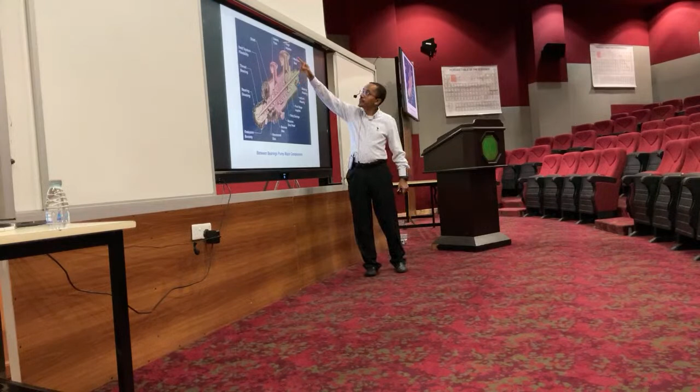Suction - it's a double suction impeller, directed to here and here. So it's double suction, then you have the 4 stages. Here, unlike the previous one, they are stacked in one direction. You can tell it's double suction because the pressure here is low. So they use the double suction to improve the requirement.

Between bearings, we have the bearings here. What else? Suction, discharge, mechanical seal are here, and the shaft. The coupling is here, and after that you have the motor.

This pump, we call it barrel type, because the insert here, or the cartridge, is considered a pump itself, and the barrel is another casing. So whenever you want to maintain it, you just pull the bundle. Why do you think we need it like this?

It's definitely more expensive, but is there any reason to go with this type? Maybe it can handle higher pressures - yes. Or sometimes if you have a very sensitive service with a light hydrocarbon that can easily leak. Axial split pumps can easily leak, unlike radial split, which have a better option. The sealing here is the flange, the casing flange, so if it's going to leak, it's going to leak from the flange, which is correct.

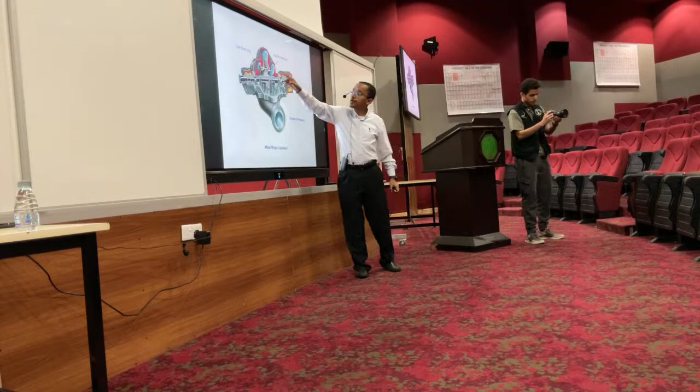Here we have the wear rings, here and here. This is a double suction impeller. You can see the liquid is introduced from the suction flange through this area and this area, and collected through the volute to the discharge. And you have the wear rings here and here.

Mechanical seal is equipment or device to prevent leakage to atmosphere, for the reason we mentioned before. It has a stationary component and a rotating component.

Stationary component is whatever is bolted with the casing; it's not going to rotate. For example, the gland for the seal is attached to the casing, so you can imagine this component is static, not rotating, stationary. While anything on the shaft will rotate with the shaft.

For example, this sleeve is rotating because it's set on the shaft. This gland and this face of the seal, we call this the stationary face, because it's stuck with the flange or the gland of the seal. And this one is rotating with the sleeve. So it is rotating face and stationary face.

You have other components to seal, because liquid will try to leak from different sources. Imagine this is bolted to the casing; the first thing it will try to leak from is between the gland and the pump, through this O-ring. So this is a static component to seal liquid from going out. It will also try to leak from under the sleeve, so we have an O-ring here to avoid it going out to atmosphere, and you have other components like this.

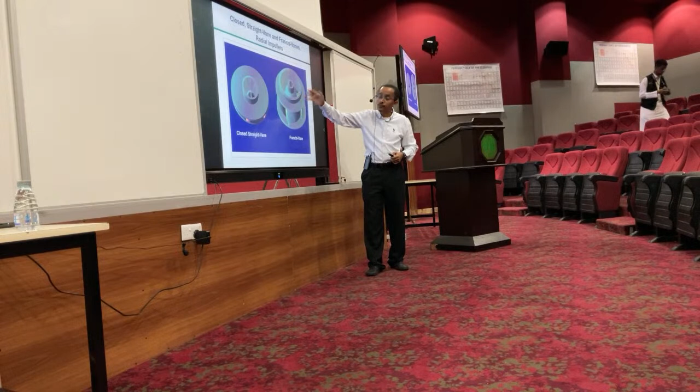We might have a closed impeller where the impeller vanes are contained with what we call the shrouds. Sometimes we have it from one direction, sometimes from two directions—we call it closed. Sometimes only one direction, so it's open, from both sides.

There is no axial flow here, so it doesn't have a shroud. So we call it open, semi-open, or closed from one side. Like this one, from the back side it's closed, from the front side it's open. Liquid goes in this way and is pushed radially to the discharge because it's closed from one side. You can tell you're looking at relatively medium pressure on this side.

Let us leave it for later. Moving to the coming slide, sometimes you have what we call pump-out vanes, which are vanes in the back side of the impeller. Do you know what's the function of them? Yes, it helps balance the axial thrust because it introduces a pressure on the other side.

It has another function, which is the main function. From their name, they call it pump-out vanes. Usually when you look at the impeller, liquid will try to go to the back side, and if you have suspended solids, they will accumulate in that side and damage the pump and the seal. So this is another option, pump-out vanes push out any solids from accumulating in the back side of the impeller.

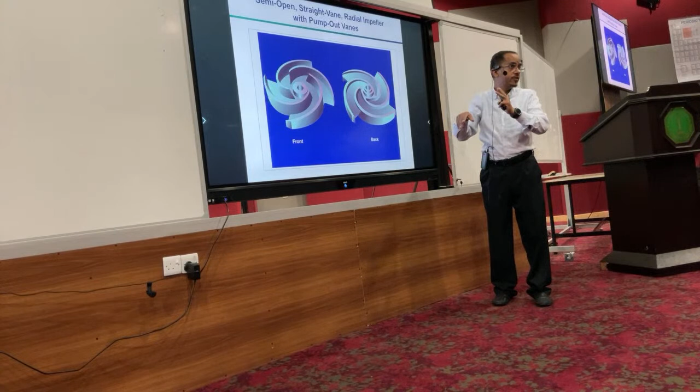We call it a closed impeller because the vanes are contained within the shroud. Sometimes we have a special type which we call the Francis type, twisted vanes. You see the vane, if you trace it from here to here, it's just twisted with an angle from this to here. We call it Francis type.

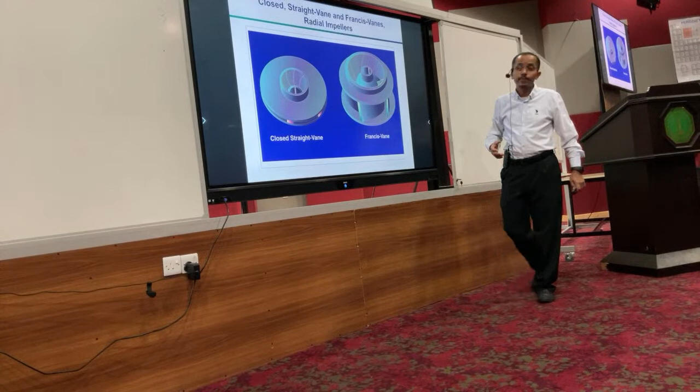You might ask, why do we need to decide which one to select? As end user, we don't select. It's part of the design given by the manufacturer. There are certain requirements that the vendor should go through to define which type can be selected.

We have a criteria called specific speed, given by this formula: RPM, which is the rotation in RPM, times the square root of flow in GPM, gallon per minute, divided by the head, which is in feet. You can tell if you have high flow, what's going to happen? Is this number going to be high or low? High, this is high, this is low, relatively low let us say.

So the number will be high, we are going to the right, it's axial flow. What's going to happen if we have a very low flow rate, high head? It's going to go to the left, we will end up with this type of equipment, with a larger impeller diameter and a very narrow gap between the shrouds to give you very high pressure, low flow rate.

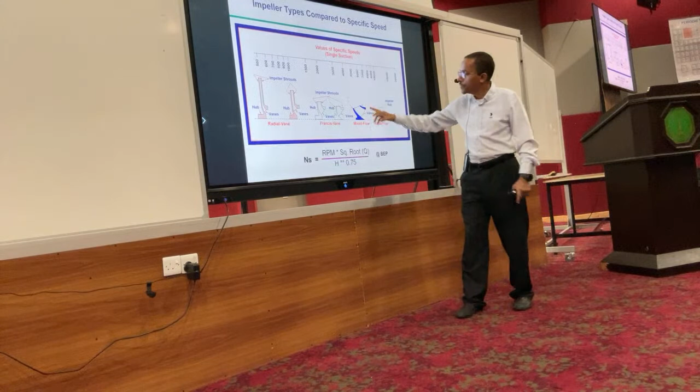Or we might sometimes fall in between, mixed flow, Francis type. So this is what defines what kind of impeller you might need to select. And as end user, we don't get into this. It's the design, the vendor selects the equipment based on these requirements.

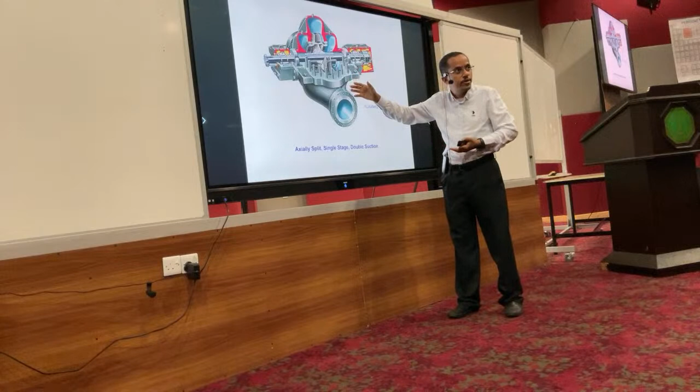Casing can be radial split or axial split, as we explained. Single volute, double volute, diffuser, staggered volute. These are related to the internal geometry of the casing, and this is what we're going to cover now. This is axial split, top and bottom. Imagine when we talk about leakage, like with light hydrocarbon, the flange area between the top and bottom is very large, so the chances of leakage are very risky and high for axial split. This is why we don't use it for light hydrocarbon or high pressure applications.

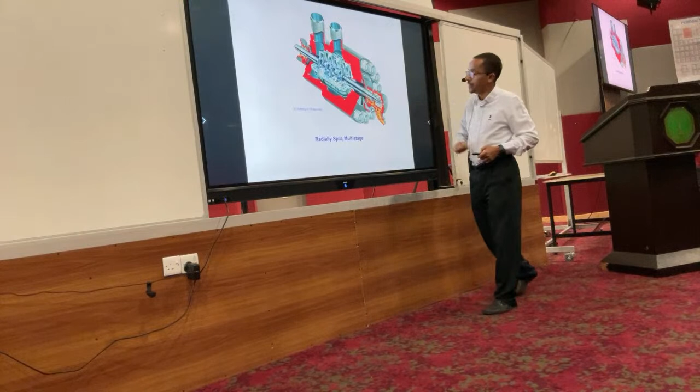Motor and gearbox. Now let's talk about the pump loads. We need to understand the loads generated through the pump to be able to support it with the bearings. So we have radial loads and axial loads.

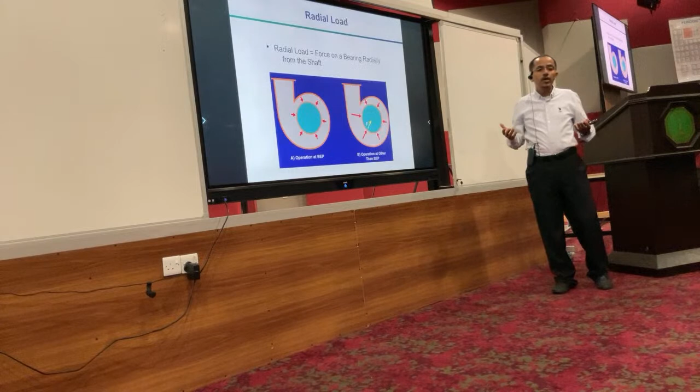Where do we get the radial load and axial load? We have static pressure, static forces like the weight of the shaft and the weight of the rotor, and we have dynamic forces coming from the liquid flow itself. These need to be understood in order to select the right bearing design or modify the geometry of the pump to reduce the loading.

When you look at the best efficiency point, where you have a smooth flow, the distribution of the forces on the shaft - imagine the impeller mounted on this shaft - the pressure or radial force distribution through the shaft will be almost the best in terms of distribution at the best efficiency point. It will not be eliminated for sure, there will still be some load, but it's going to be minimum. While if you operate away from the best efficiency, there will be some turbulence which will lose the condition that you had at best efficiency.

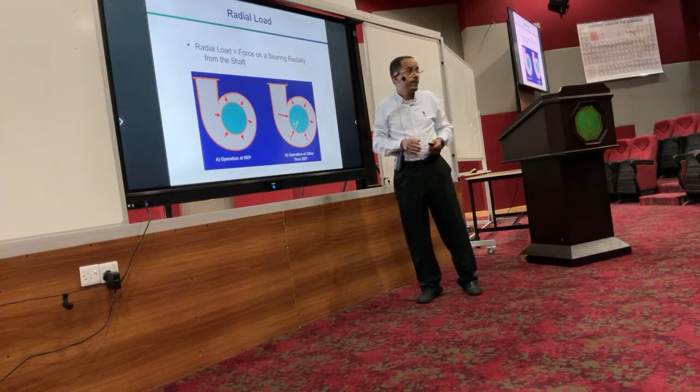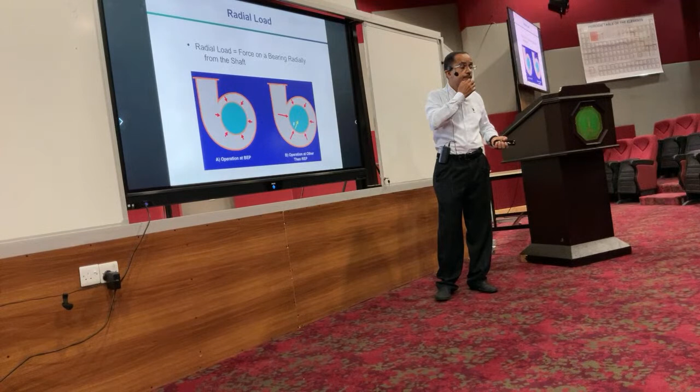Now, non-distributed force, what does it cause? Forces on the shaft that give you vibration. The turbulence coming in the pump, all this will be seen as radial loads on the rotor, which will be seen as vibration because the whole rotor is not running in a smooth condition. More vibration basically means more loading on the bearing, but this doesn't get exhausted and go away from the bearings.

Just imagine you have turbulence - what's going to happen? Stability is not going to be smooth, meaning you'll have more movement on the shaft itself. It will be seen as more vibration, and more vibration will impact the reliability of the equipment. So this is not what you're looking for.

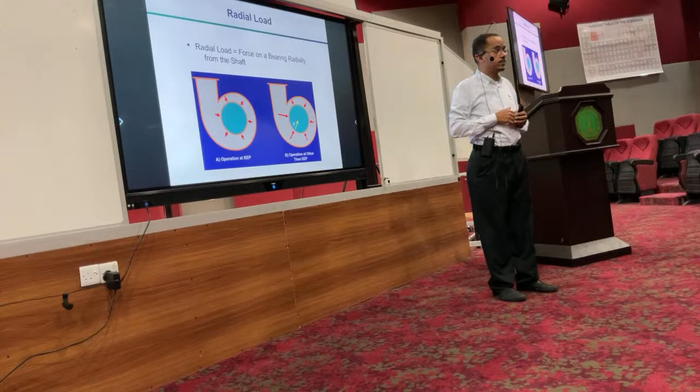This is why we say avoid running away from the best efficiency point. I do agree we should run nearest to the best efficiency point, but I'm after how severe it could be - it could be severe to the point that you damage the equipment very quickly. Especially when we talk about high energy equipment, running them at low flow, very low flow rate, you can damage it within seconds because of cavitation.

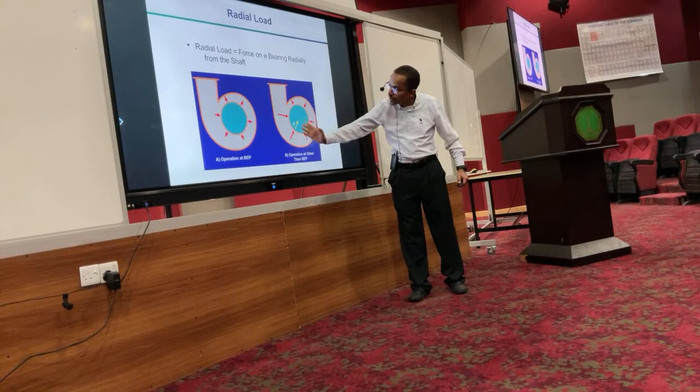Because of cavitation, and even when you look at very high cases, because of vibration as well. Now this area we're showing here, we call it the volute. If we take the resultant forces acting in it, like in one direction and to here - imagine liquid flow going between the vanes all the way through the volute to the discharge flange.

During abnormal operation, the result will be a force acting on the shaft. This is the shaft - let's imagine a force is acting this way, so it will be pushing it this way. It might be very high, to the point that the equipment might not withstand it.

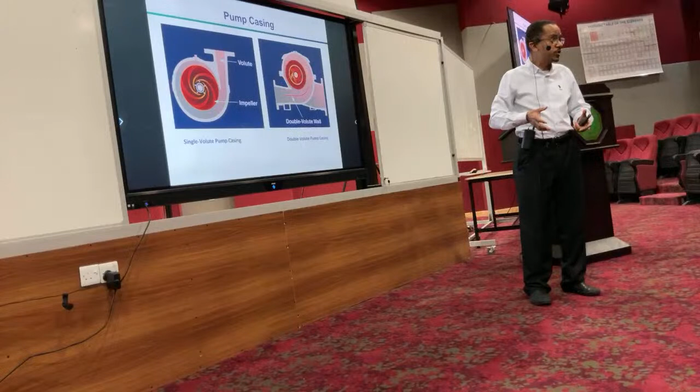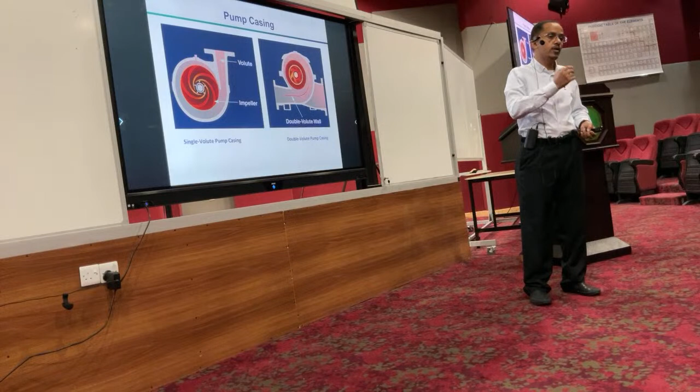If we talk about an overhang pump for example, we have a standard limitation for the size. Why? Because we know for a fact that if we have large equipment with a very large radial load, it will have very high vibration that won't give you good or reliable equipment. So for example, Aramco or other end users limit a single volute to a certain size. If it exceeds that size, it means the loading is more and the stability won't be as good as if you have it with another option.

So the other option is they have another wall, they call it double volute. What does a double volute do? If you remember one of the pictures, it was showing the volute extended to the discharge flange. It basically splits the liquid flow into this direction and this direction, so the liquid will exert a force this way, and the opposite force the other way.

So it will somehow reduce the radial load on the shaft, and this is one way to balance and reduce the radial load using a double volute - that's one of the simplest ways. Just imagine if we can have more walls vertically, that will improve the radial loading more and more.

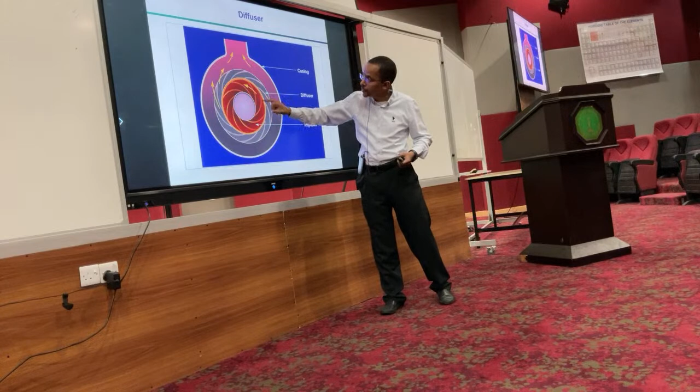And this is what we have with a diffuser type. The diffuser is a stationary element like this, with stationary vanes. The liquid passes through and splits between the stationary vanes - this is the impeller, so the liquid will be pushed through the diffuser vanes, and that will give a very perfect balance for the flow, ending up with a very smooth balance for the radial load.

This is more expensive. Only cost? Yeah, it's only cost. This is the main issue, of course.

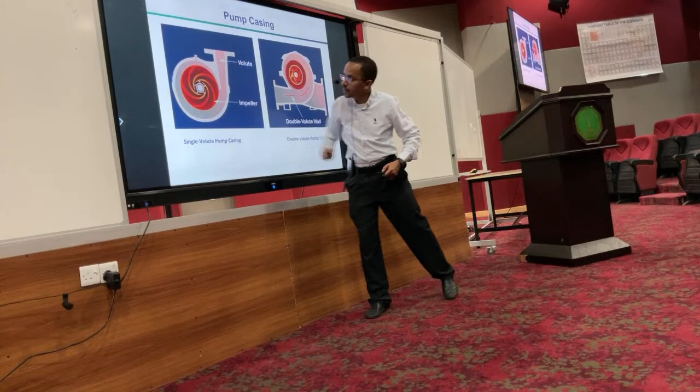There is a between option for radial loading, what they call staggered volute. Imagine this is the first stage and this is the second stage. We said the radial load is acting this way, right? Here, for example, it's acting this way, and the other one is acting this way. You look at it, they are balancing each other somehow. So that will balance the radial load. That's another option, a cheaper option.

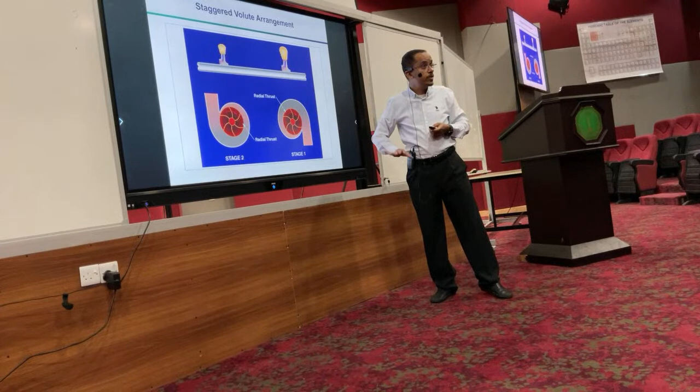Of course, as an end user, we don't say go with this. We're talking about multi-stage pumps. Sometimes they go for staggered volute arrangement, or sometimes they go with diffuser. It's a vendor call. For us, we want equipment with a certain efficiency.

We have what we call life cycle cost evaluation. This is the criteria for how to buy equipment: how much it will cost to operate and maintain it for 20 years. We count for energy consumption, which means we count mainly on efficiency, power consumption, maintenance and capital cost. Sometimes the capital cost is peanuts comparing to the total. So that will push him to go with diffuser if he is not able to maintain the efficiency.

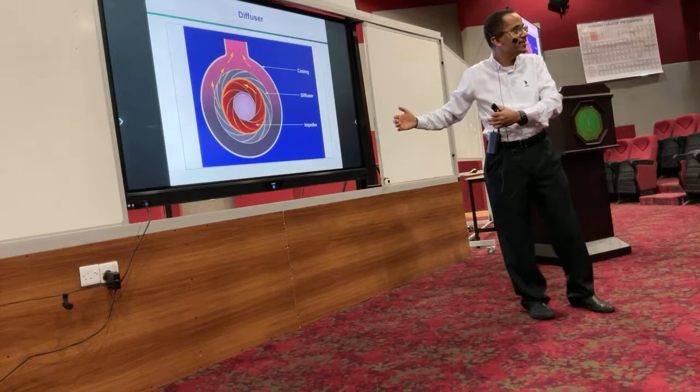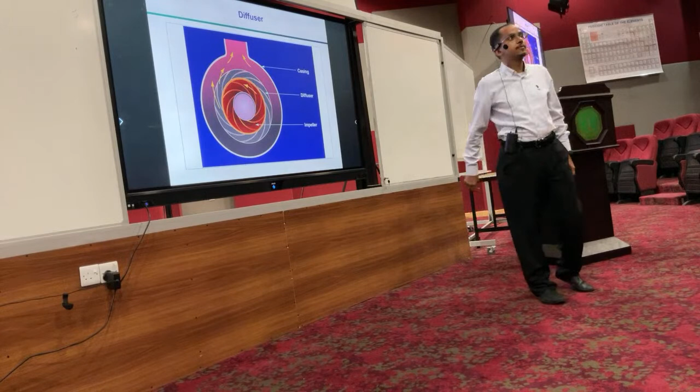Yeah, when you operate far from the best efficiency point. Wait a bit, it's on the slide. I know what you are looking for. But this is what we have as a diffuser. This is what you are talking about.

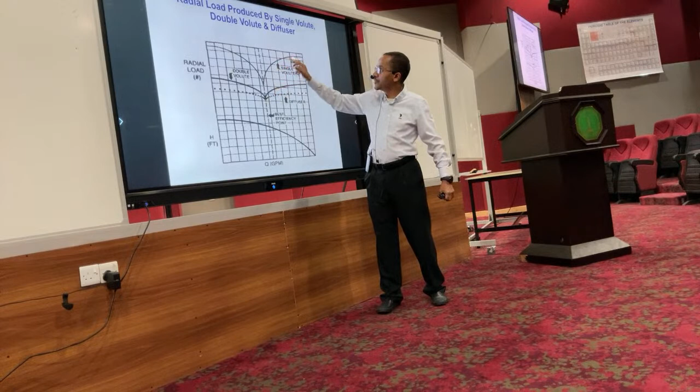When you deviate and operate with a wide operation range - look at the difference between the loading here, this is the curve for the radial load - it will be lower with respect to this, but the increase is very high. It jumped from here to here with a single volute. That's a proof of the argument earlier when we said it's not recommended for large equipment, because basically we'll have very high loading and that's not going to be a good option.

So this is the single volute. For double volute, there is a huge difference, you see the difference between them is very high. But still there is a deviation, or increase, and when you go away from the best efficiency it will increase the radial loading. The diffuser is the best - you see, the deviation is little, so it's the best option in terms of loading.

So what about the hydraulic losses then? If you deviate from the best efficiency with the diffuser?

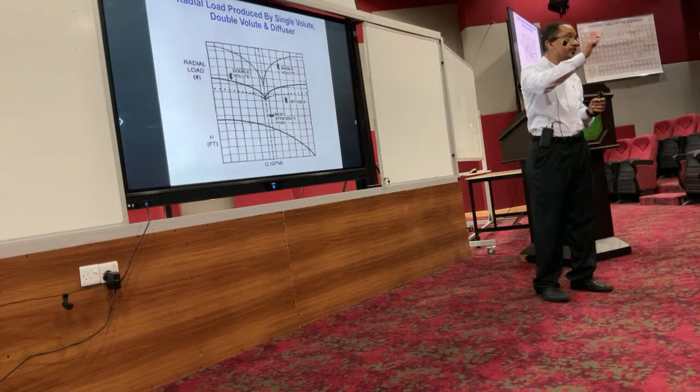The losses, okay, of course we're talking about, if we talk about efficiency, sometimes going with diffuser type will give you a better, good flow that will improve your efficiency, let's say. But if you compare it to the best efficiency point of the equipment, sometimes depending on the design, there are turbulent losses due to turbulence in the diffuser. Sometimes the efficiency that diffuser type has is lower than expected.

But in general, we usually don't operate at best efficiency, just close to it, but mostly it's not very close. Of course we have equipment that is either standard or custom type. If it's custom type, we try to select it very close to the best design, closer to the best efficiency, but there will always be some gap.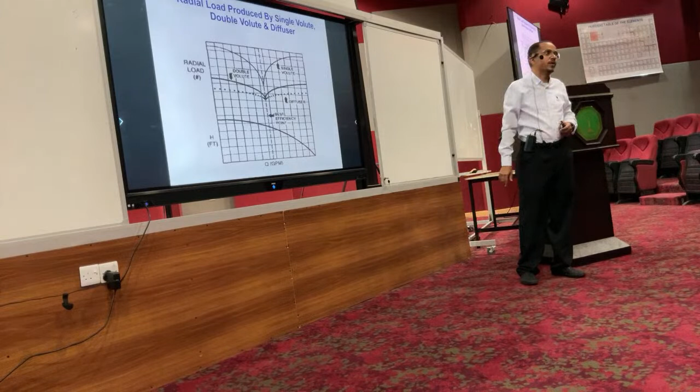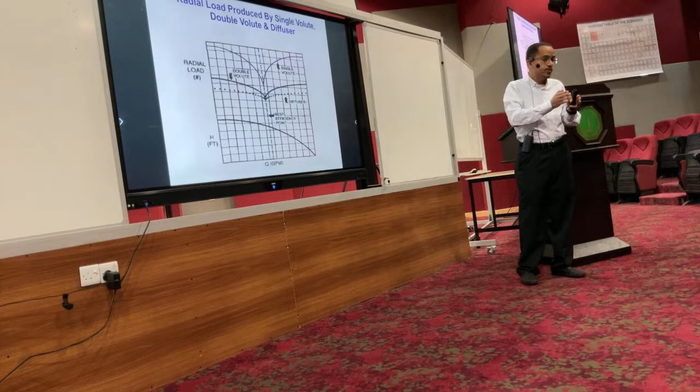Plus we have a difference between the design point and the normal flow. Normal flow is the average flow through the year. So that will be like an average flow, which means the equipment will not be operated exactly on the best efficiency point, but within a range.

Axial load - we have forces on the bearing from the axial direction. When we look at it from a static point of view, the pressure on the pump, on the impeller, you have suction pressure, and from both sides discharge pressure. Both are discharge pressure, but you can see the pressure here is higher. Since this discharge pressure and this discharge pressure cancel each other, you will be left with this, and you can tell this is lower and this is higher. So you end up pushing the impeller to the left.

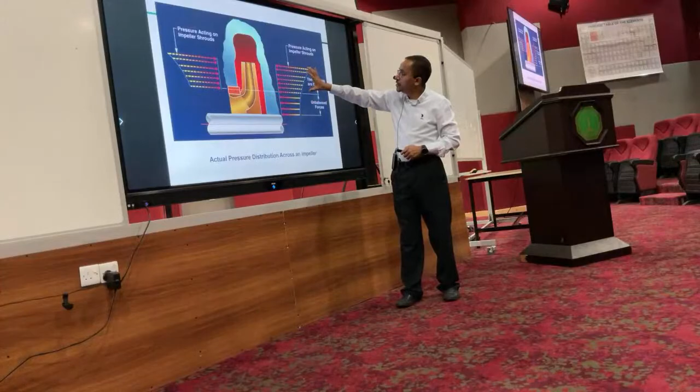This is what happens in reality because you have some losses, so it's going to be like a pressure distribution - higher here, lower when it reaches the bottom. But in general, this area and this area will see the same pressure, so it will cancel. So you end up only with forces from this area, acting in one direction.

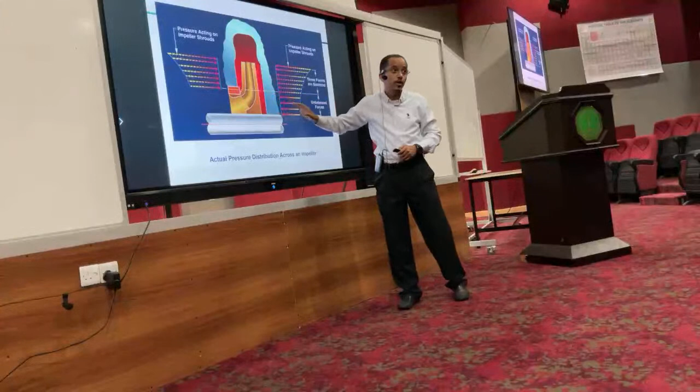Before we continue, we also have other elements on the axial loading, especially when we talk about vertical pumps. The load of the shaft has to be counted sometimes. Vertical pumps are very sensitive, or the bearing design is very sensitive, to the mode of operation. Because sometimes the force is higher in one direction, then if you change your operation condition, it might be pushed to another direction.

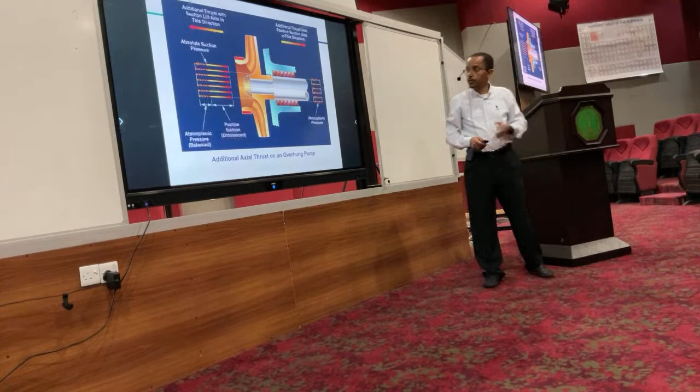Okay, let's talk about head now so we can talk about performance. The head can be defined by different things. Head is energy per unit weight, or head is elevation difference, or head is differential pressure when you convert the pressure to head. If you have a liquid pumped from this level to this level, this is what you get as head, right?

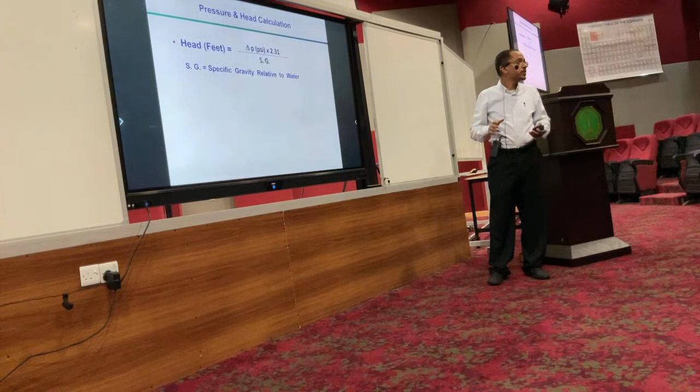Whenever you look at the pump performance curve, you see head versus flow. The relation between head and flow is: head equals differential pressure times 2.31 divided by specific gravity. So whenever you change the specific gravity, the head stays constant for a given flow rate, but it might impact the given or generated pressure.

One of the things we have to understand during the early stage of design is the requirement for the pump. The designer, when he starts to construct or design the facility, starts with the static equipment - what is the requirement for a feed, static equipment pressure like a vessel, a reactor, what's the source flow and pressure coming to you. Then when he designs his network with the piping, everything, he goes and selects the equipment, the rotating equipment.

So it comes at the last point. First you have to understand the system requirement - how much is required to push you from here to that point, how much resistance from the system will be seen, so I can overcome it with a properly sized equipment. This is something you don't see in daily activities - it's only during a change in design, like a design stage.

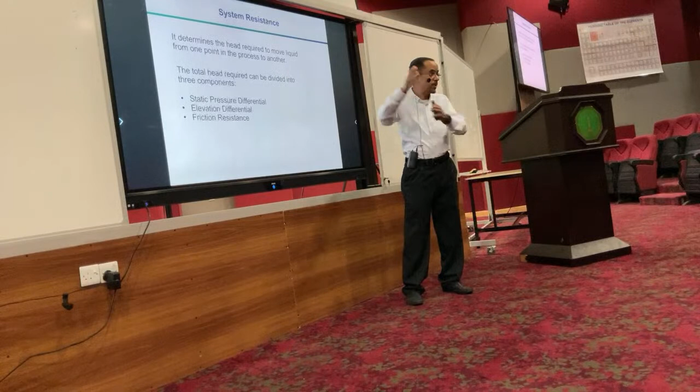And there is friction resistance. Is friction resistance static? It's not. When we say static, we basically look at it with respect to the flow rate - I have a pressure here, I have a pressure there, and I'm not going to change them regardless of the flow rate. Same with elevation. But friction - what happens to friction if I increase the flow? It increases. That means I have to understand my requirement from the beginning to cover the worst case, because if you design without considering the worst condition.

You might end up with equipment that will not be able to deliver. So you have to understand the system resistance.

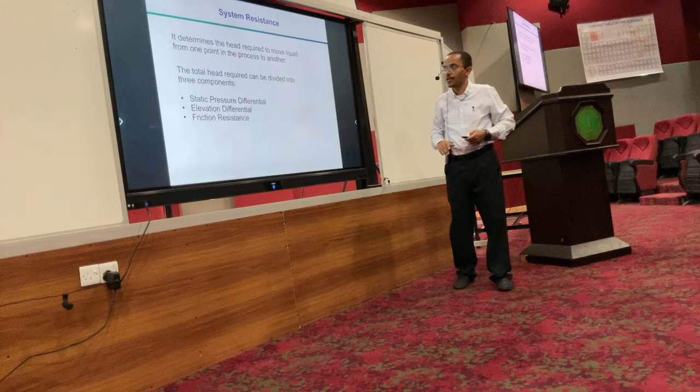The first one is the pressure difference, and pressure can be converted into head by the formula we went through. Then elevation difference, and the friction resistance. If I have a cooler with a control valve, what's going to happen if I close the control valve? In terms of friction, more friction. So I have to consider this in my design to overcome that friction.

I also have to understand how much flow the pump is going to deliver. Whenever you change the friction by increasing the flow rate, you will basically increase the pressure drop exponentially.

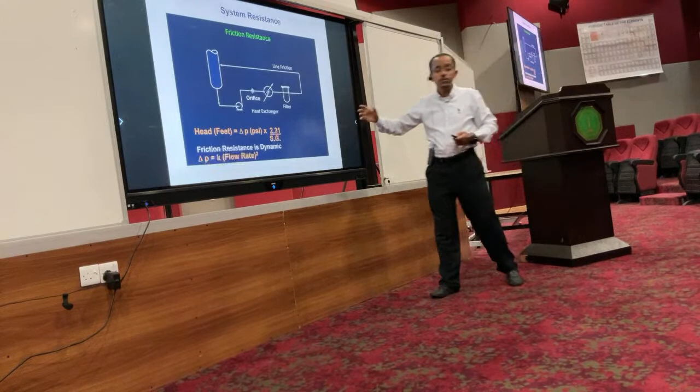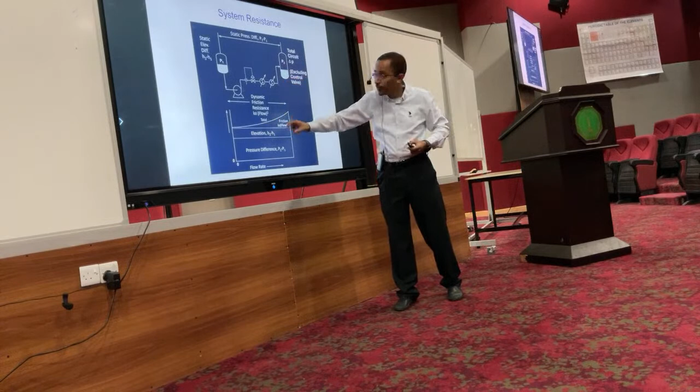What is K? It's a factor, the friction factor. Is it based on a standard? No, it's based on the system friction: how much friction in the piping, how much friction in the static equipment and in the valve. Whenever you increase the friction, the curve jumps up very high, because the factor can increase as well.

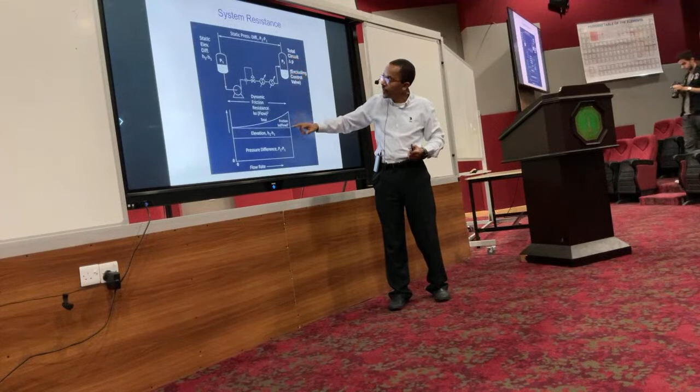In a real system we might have point A, point B, with different elements like control valves and static equipment. If we put it all in one curve, we have the pressure difference plus the elevation difference and the friction resistance. Whenever we change the flow rate, this will change and give us the system resistance curve, considering the control valve at a certain opening. The control valve or valves play the main role in changing the system resistance. Whenever you close it, it will shift.

So for the pump curve, to understand the requirement, we have to first understand the system curve, then determine what I need to give the pump. The pump curve shows the relation between head and flow rate. Typically, centrifugal pump performance curves follow the same behavior: maximum near shutoff at zero flow, and dropping as flow rate increases.

If I plot it together with the system curve, the equipment will operate at the intersection point. The intersection between the system curve and the pump performance curve is my operating point, so the pump will operate there. Do I need to operate only at that point? I might need to operate at different points, selecting the equipment to operate there. So how can I control it?

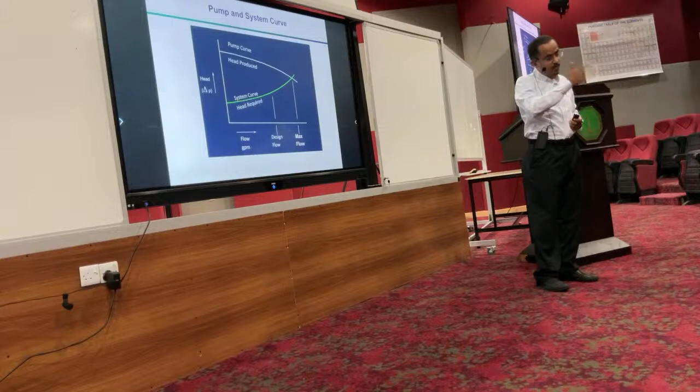Can I control the equipment or control the system? If I want to control the system, I can put a valve to increase the friction. Can I control the pump? Yes, I can use a variable speed drive to change it. If I have a lower speed, I can just shift the curve lower.

The pump performance curve can be shifted lower by reducing the speed, or higher by increasing the speed. That's one way to adjust the operating point, moving it from here to here. For example, if I shift it here, I'm going to operate at this point, or maybe higher to operate at another point.

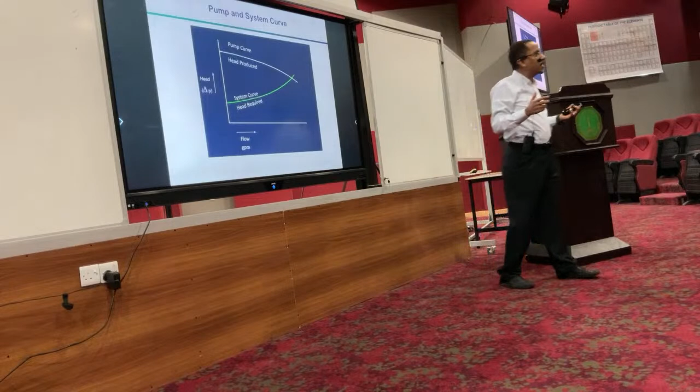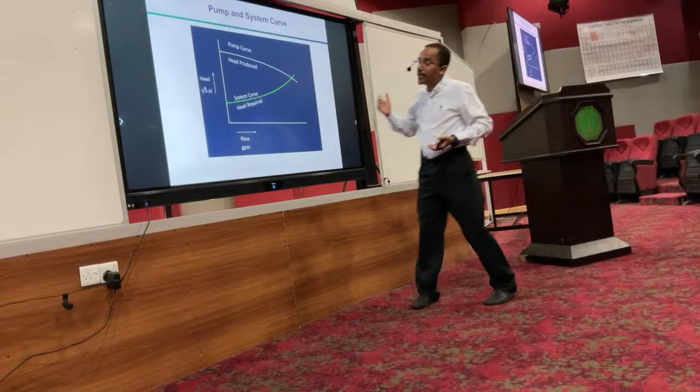But variable speed drives are very expensive, so you don't go with them unless you need them. There's always an economic evaluation, and sometimes they're not even attractive depending on the system curve. Sometimes the gain you get, depending on the system curve or slope, isn't that much, and it won't add good value. So I don't want to go into detail, but it basically runs through economic evaluation.

For the system, we can throttle, which is just shifting the curve by increasing friction to operate here. So this is my new system, I'm operating at this point, meeting my requirement. But what is the disadvantage here?

Loss of money and energy. How do you lose the energy? Less reliability, less efficiency, continuous head loss, you're generating more friction in the system. We can see the loss if we change the speed and take the pump curve, intersecting it with the original system curve—you will see the difference in the line. But imagine you don't have control over the speed.

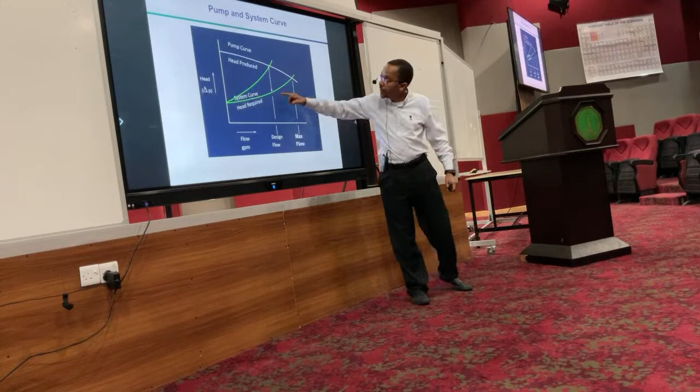You have to live with the system. Basically what's going to happen: you are operating the equipment here. This is the original curve without throttling. This value of head here is what you basically lose for the control valve, and head downstream the control valve is this value. So you are operating equipment that generates this head and loses this to get this. It's like huge losses, and that needs to be considered.

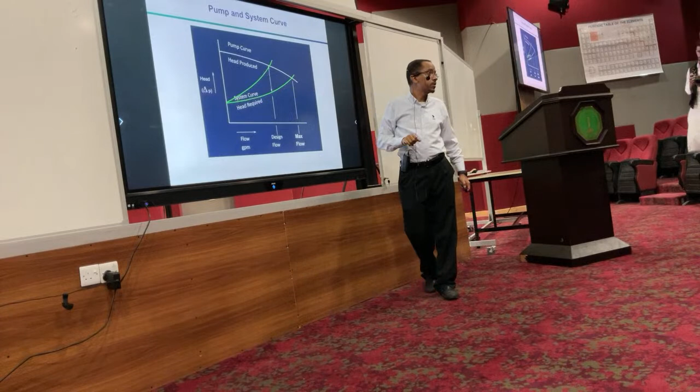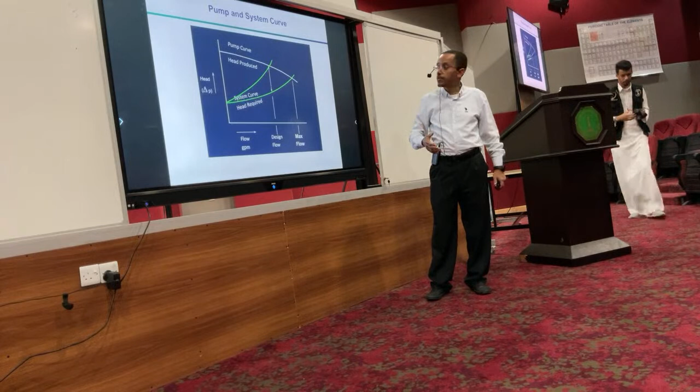Sometimes this loss is power, lost energy, as I mentioned, in terms of friction in the control valve. It's going to be like a throttling for the pressure, and that's a loss for the pressure. This has to be considered during the design, especially when you talk about high energy equipment.

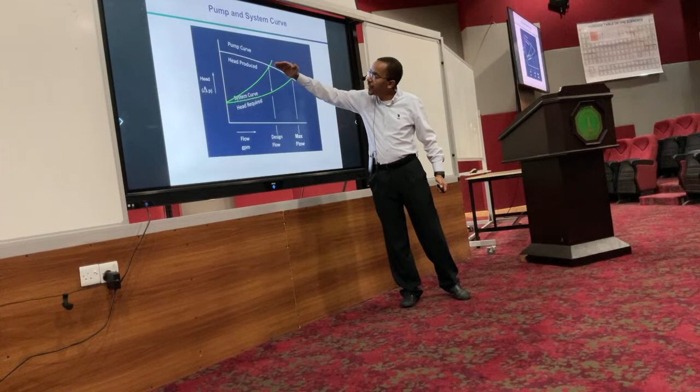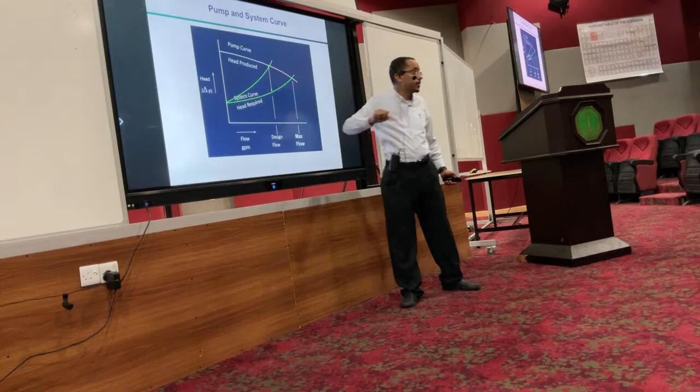So you have to consider something else. All these parameters will define if I should go with a variable speed, if I should design the equipment to throttle a little, but I need to avoid one thing: whenever I design a system that from day one is oversized, I should avoid this. If later on I realize I have oversizing, I can improve it by shifting the impeller diameter, by trimming the impeller. I will be able to shift it here and eliminate or reduce the throttling. So that's like a correction for a problem in design.

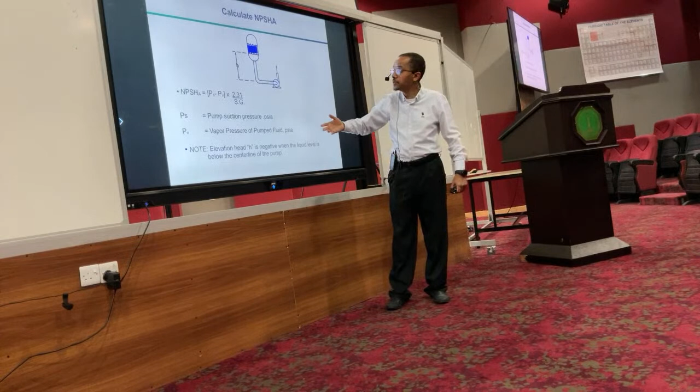We have NPSH available and required. NPSH available is what's available for the system, how much is available at the suction flange. And you have a required value, which is the requirement for the pump.

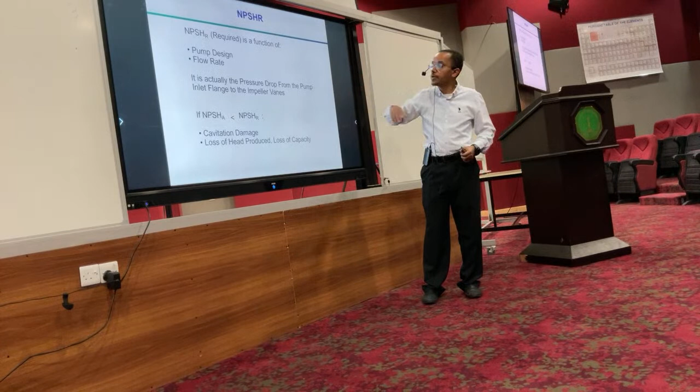So it's a design criteria. It changes with the change in flow rate. When you increase the flow rate, the requirement for the impeller will be higher. You have to overcome cavitation with a good margin. NPSH available should be higher than the required.

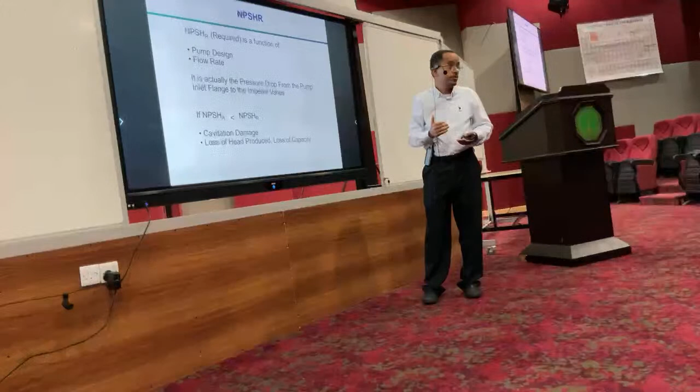Whenever you have it lower, you will have a problem. This is how we explain it here. Let's imagine I have a suction flange, and this is the impeller discharge. This is my margin for the NPSH requirement. Suction pressure, let's say NPSH is this value. If I have a drop in pressure that will take me to a point of reaching NPSHR, that will cause cavitation to the equipment.

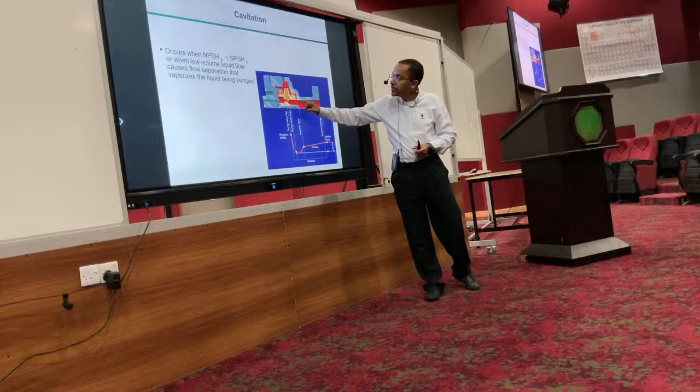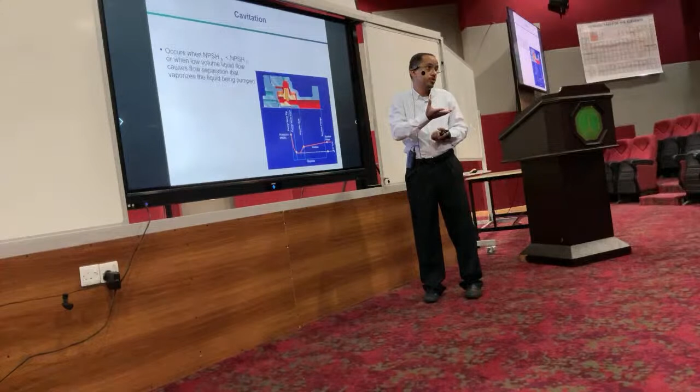Why? Because if you have cavitation, usually when you drop the margin, you start to have cavity bubbles generated through the stream. Sometimes they're generated even before getting through the pump flange, in the stream because of low pressure. It can generate here. If it reaches a stage where the pressure starts to pick up or increase, it will collapse. The collapsing bubble generates high energy that might result in damage, which is like in terms of pitting or damage to the vanes, like what we see here.

We see it here and here. It doesn't happen at the beginning of the vane; it's in the center where the bubbles start to collapse.

Sometimes if the bubbles are still not reaching a pressure that will cause them to collapse, they will start to stick together with the surface, forming a vapor cloud, and extend to the back side, and collapse on the other side when it reaches a higher pressure. That's why you have cavitation damage on the back side. That's another mode of cavitation.

How sensitive are hydrocarbons to that type of damage mechanism compared to water?

Well, in terms of damage, the damage will happen in both. Now we are talking about the energy that will be generated in this collapse and its impact on the metal. It's related to vapor pressure. I wouldn't think it has a huge relation comparing water and hydrocarbons.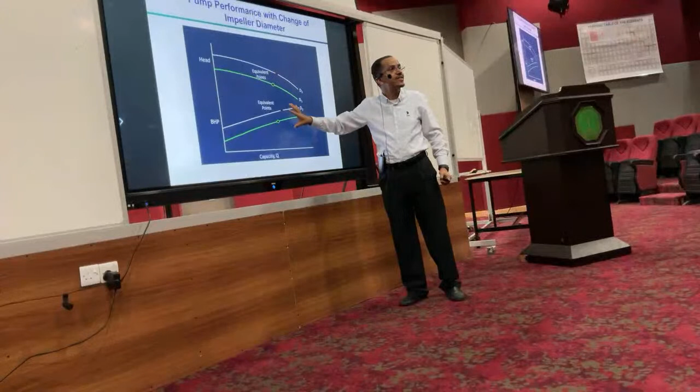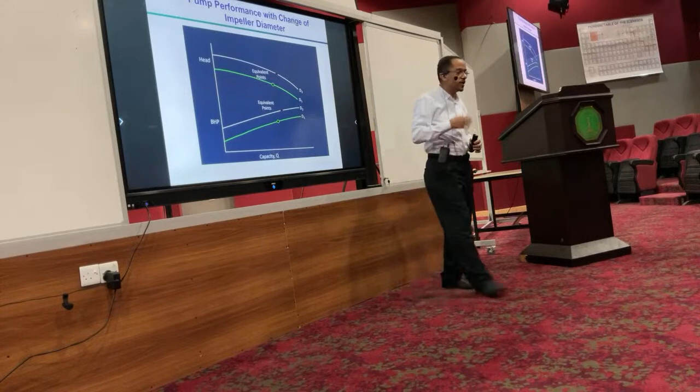Performance curve with a change in impeller diameter. If I go with a larger impeller diameter, the head will be generated higher, which also means the power curve will be shifted up. One problem we might have: we go with a larger impeller diameter to meet a new requirement, do the calculation, think everything is good, then we discover that we did not check for the change in power, and we run into a problem with the motor. So this is something that, if we need modification on site, we have to look at.

Sometimes you go with pumps in series operation, or in parallel operation. Why do we go with series operation? To increase the head. Sometimes we go with what we call a booster pump and a bigger pump.

If you remember when we talked about cavitation, we said the more flow and pressure you have, the more NPSH that pump will require. So what they do sometimes is improve it with only a booster pump that will just boost the pressure a little bit. The differential pressure of that pump is low - it's just there to boost up the pressure, to improve the suction pressure before you introduce the second pump.

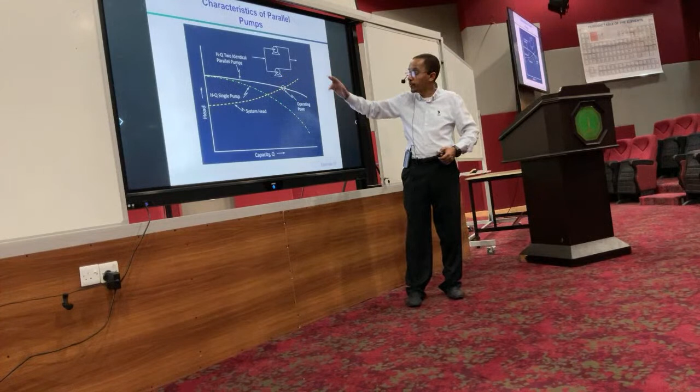While if we talk about parallel operation, we are basically looking for more flow, while the head will be the same. You are not going to double or change the head. So for any given head, you will double the flow rate. This is why you end up with a stretched curve, unlike the other one, for a double parallel operating equipment. And my performance curve is here.

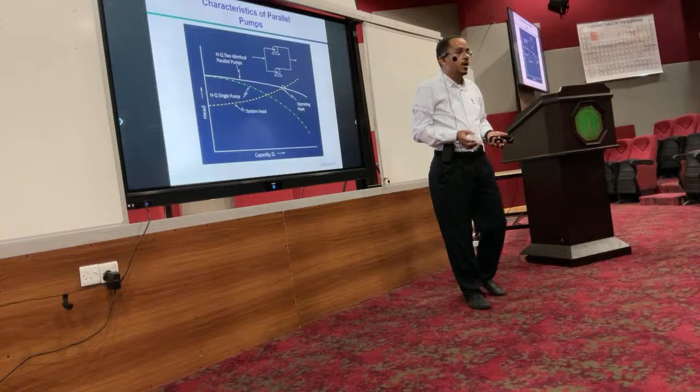So when we double the flow, we must watch out for NPSH requirement if we increase the flow with parallel operation. You are looking at it individually - it's a suction condition, you are not looking at the NPSH curve for the combined system, because you are looking at each pump individually. How much is passing through? It's a suction condition - how much is the flow, how much is the NPSH for that equipment?

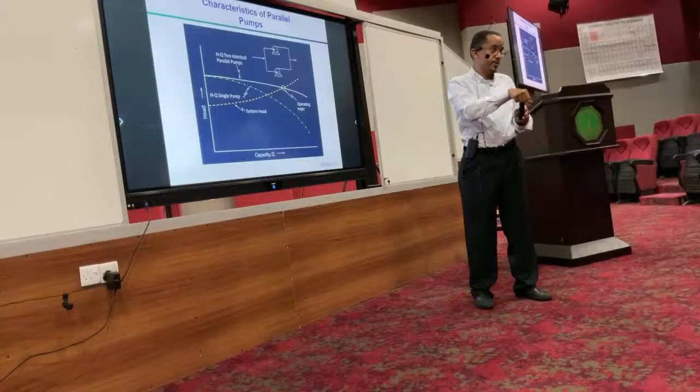There is one important thing when we look at parallel operating equipment. Whenever we have a different performance, how does the system respond? Actually, the equipment will operate based on the back pressure from the system. It will try to give the system whatever pressure or head is needed.

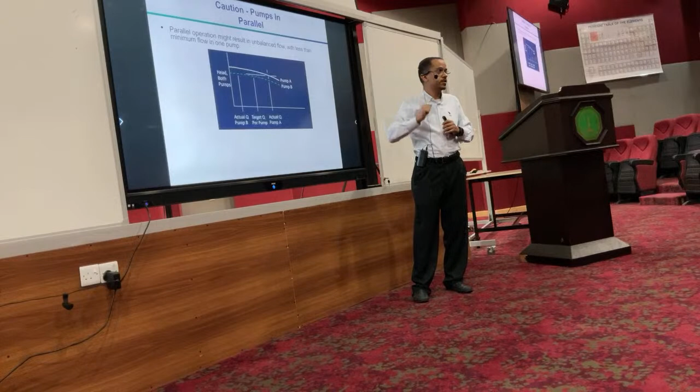So if we have this pump operating to give this head, and I have a sister pump next to it but it's not in good condition - maybe old, aging, lower performance - what's going to happen in this case? We're talking about head now. The system, with two pumps, will try to give the same head at that location. How is the pump going to react?

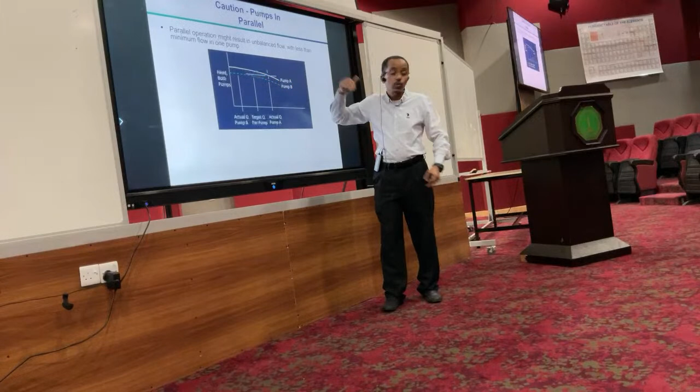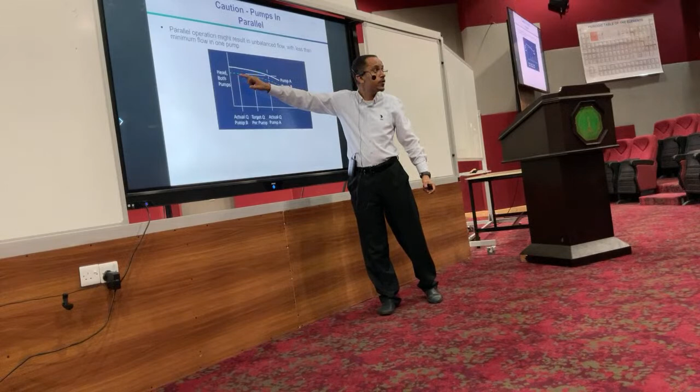It will depend on their performance. If I have, for example, equipment that's already been brought back from maintenance in good shape, and this is an old piece of equipment, they will both try to give the same head. Let's say this is the head requirement - that means this pump will be operated at this flow rate, and this pump will be operated at this flow rate. This bad-performing equipment, running at a very low flow rate - what's going to happen? You will kill it. You will run it into cavitation, vibration.

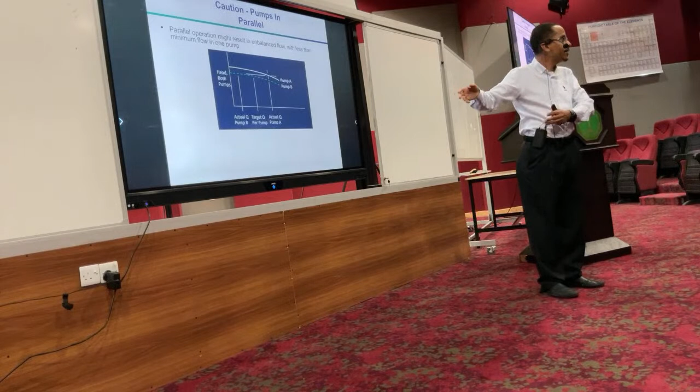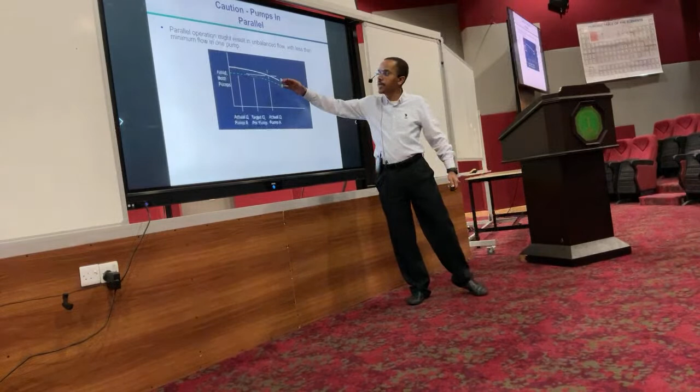But sometimes operating this pump at a very high flow rate will also kill it, because you are looking at a trouble zone - running it very high puts it in an unstable zone with high vibration, and sometimes you will end up damaging both pieces of equipment. So it's always recommended that whenever equipment is brought back from operation, you check its performance.

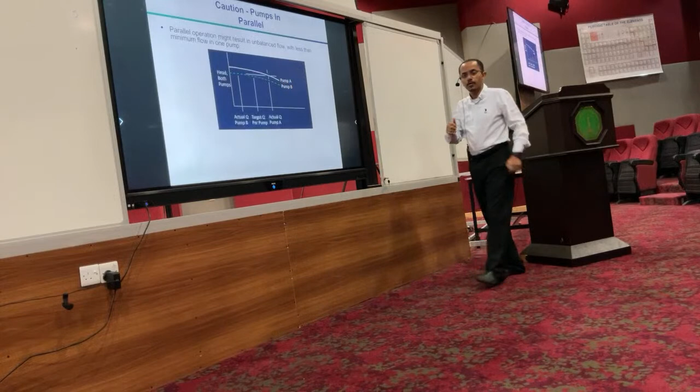There are different ways of controlling the flow. The basic way is to control it through control valves. For parallel operating pumps, control valves bring the system to control the flow rate to make sure they deliver the same.

There is another way, a different method called minimum flow control or recycle control, also known as minimum flow recycle control.

This prevents the equipment from running at low flow. What does it do? I have a system requirement - I don't want to run the pump at high or rated flow, but at the same time I need to protect the equipment. I can generate 50% of the required flow going to the system and the other half recycled back. This protects the equipment from running at very low flow and prevents damage due to vibration or low flow operation. So this is one reason.

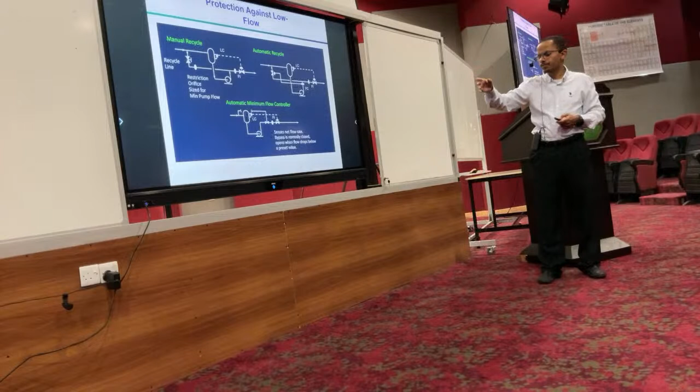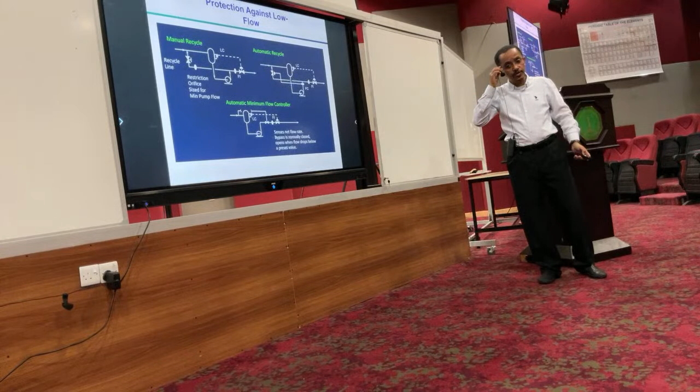Okay, we are almost there. Common centrifugal pump systems must be protected against low flow, as we mentioned. We never allow the fluid to heat up because we might run into cavitation. Minimum flow is normally 25 to 30 percent of best efficiency point. This is how we have manual flow or recycle back for minimum flow protection - sometimes it's manual, but mostly it's automatic. Sometimes it's common across different operating pumps, and sometimes it's individual.